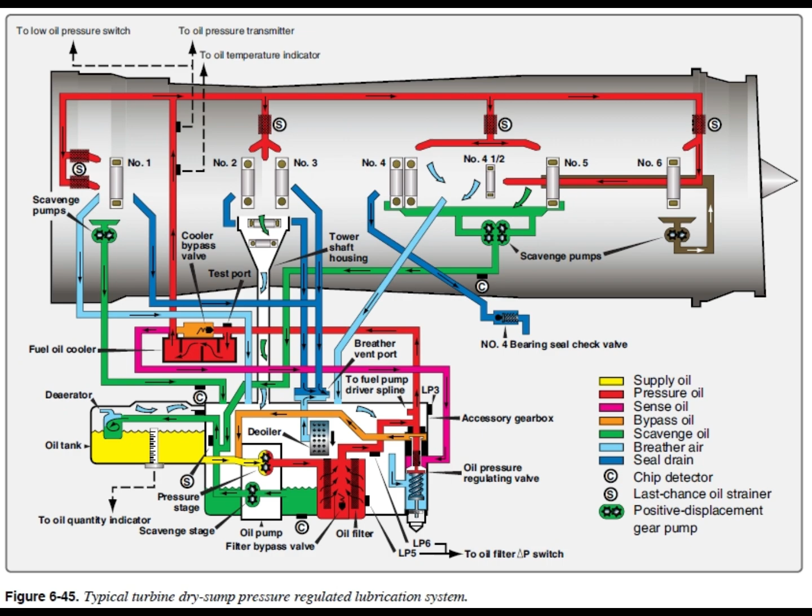And speaking of heat, have you ever thought about what happens when you turn on an anti-ice system? How does that affect engine performance? Well, when you activate the anti-ice, it uses bleed air from the engine, which takes away from the air going to combustion. So it reduces engine power a little bit. Makes sense. You're basically diverting some of that air away from creating thrust. What kind of indication would a pilot see on the instruments when the anti-ice is on?

Well, you'd see changes in the tachometer, EGT. EGT, that's exhaust gas temperature. Right, and EPR, engine pressure ratio.

Okay, here's a little thought experiment for you. Imagine an engine is running at high speed on the ground just before takeoff. What do you think happens to the air pressure inside the inlet? Well, you'd think the pressure would drop, right? Because the air isn't moving forward at high speed yet. That's what I thought too. But actually, it increases. What?

Really? Yeah, the inlet duct is designed with a divergent shape, meaning it widens as the air flows through. And this widening actually causes a slight pressure rise. Wow, that's counterintuitive. So even when the plane is stationary, the shape of the inlet duct is playing a crucial role in managing airflow and pressure. Absolutely. It's all about optimizing engine performance.

Now let's talk about reciprocating engines for a bit. They have a completely different cooling system compared to turbine engines, right? Yeah, they use a combination of air and oil cooling instead of relying primarily on internal airflow like turbine engines. Right, and I remember those air-cooled engines with their big cooling fins. How does that whole system work?

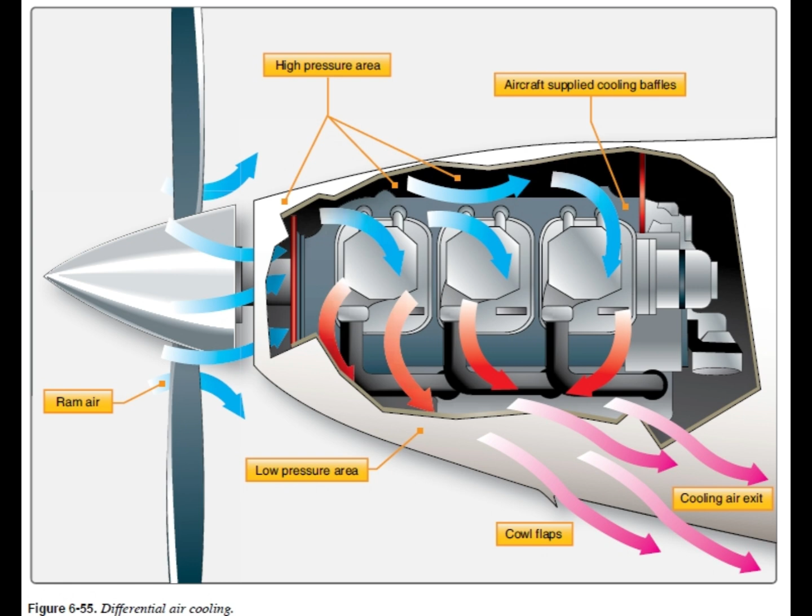When the engine's cold, the flaps are closed to trap heat and help it warm up. Once it reaches operating temperature, they open to allow more cooling air through. So it's all about maintaining that ideal temperature.

What about those cooling fins? Those seem pretty crucial to the whole air cooling process. Oh, absolutely. Those fins are essential for dissipating heat, but they can be vulnerable to damage. Yeah, I've seen fins cracked, bent, even completely broken off.

Vibrations, impacts from debris, it can all take a toll on them. So what happens if a fin gets damaged? Is it a quick fix? It really depends on the severity of the damage and where it is. Sometimes you can repair it, but if it's bad enough, you might have to replace the entire cylinder.

Wow, those fins are a lot more important than they look. Definitely. They might seem small, but their job is huge. It makes you realize that every single part of the engine plays a crucial role.

Speaking of which, we've got to talk about those temperature monitoring systems. They're like our eyes inside the engine, right. Absolutely. They give us that real-time data we need to keep those engines running smoothly.

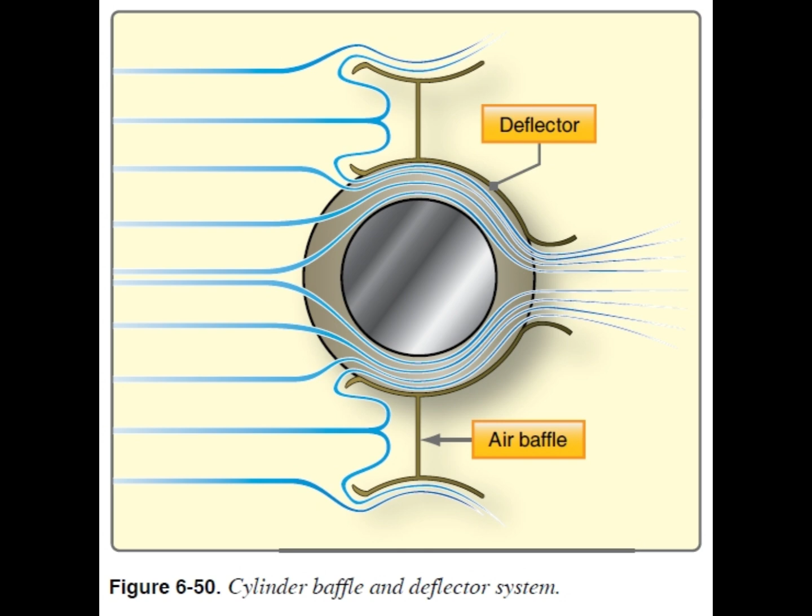So for reciprocating engines, you've got the bayonet and gasket type probes for the cylinder heads, right? What's the difference? The bayonet type is just like it sounds, it uses a bayonet fitting to attach to the cylinder head. So kind of like what you see on a rifle. Yeah, it makes it quick and easy to install and remove. And the gasket type uses a threaded fitting and a gasket to make a nice, tight seal.

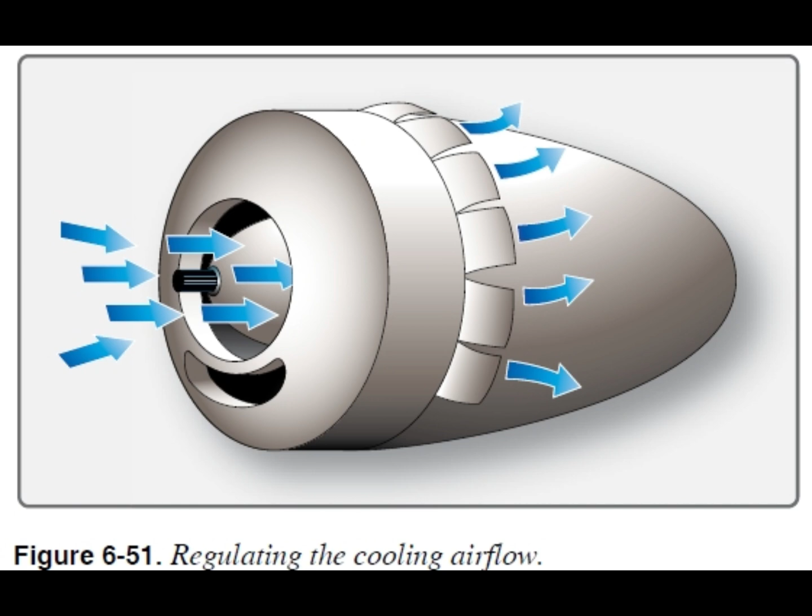So each type has its own advantages and disadvantages. Right, it often comes down to the specific engine and what the manufacturer recommends. Now, how do those probes actually work? How do they measure the temperature?

They use something called a thermocouple. Basically, it's a sensor that creates a voltage based on the temperature difference between two different metals. So one part of the thermocouple is touching the hot cylinder head, and the other is at a known cooler temperature. Exactly, by measuring the voltage between those two points, you can determine the temperature of the cylinder head.

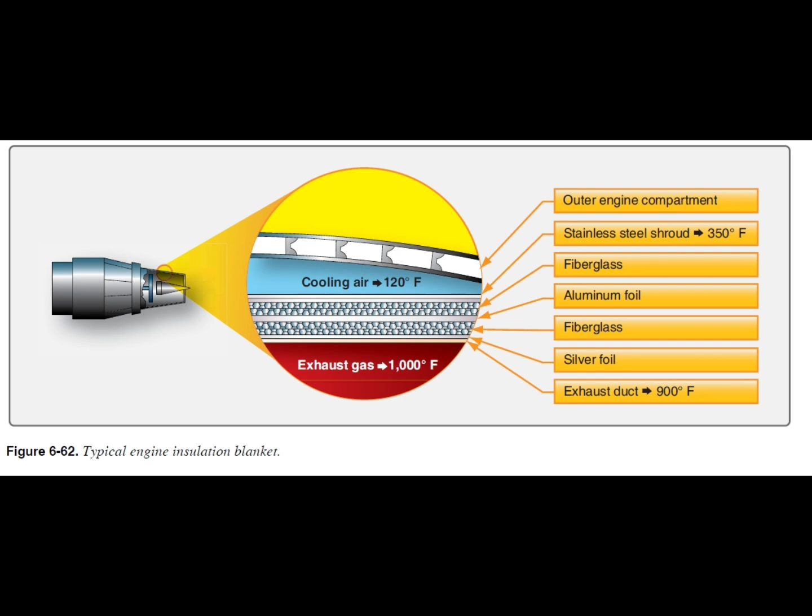That's pretty ingenious. I never realized how much science and physics goes into something as seemingly simple as a temperature gauge. It's amazing, isn't it? Just goes to show how much thought and engineering goes into keeping these engines running cool and efficiently.

This has been really eye-opening. We've covered so much ground today, and it's given me a whole new appreciation for these cooling systems. Me too, there's still so much to explore though. I know, I'm already looking forward to diving back into this next time. Sounds good to me, ready to keep talking about engines.

I was just thinking about those engine insulation blankets, those things that protect the surrounding aircraft structure. Yeah, those blankets are crucial. They prevent heat damage to all those important parts and make sure the whole aircraft structure stays intact. It's like they're a shield against the heat.

Exactly, a thermal barrier. And speaking of protection, I was thinking about those cylinder fins and how vulnerable they are to damage. They can get cracked and bent, even broken off. Oh yeah, and you know what? It could be something as simple as a pebble during taxiing.

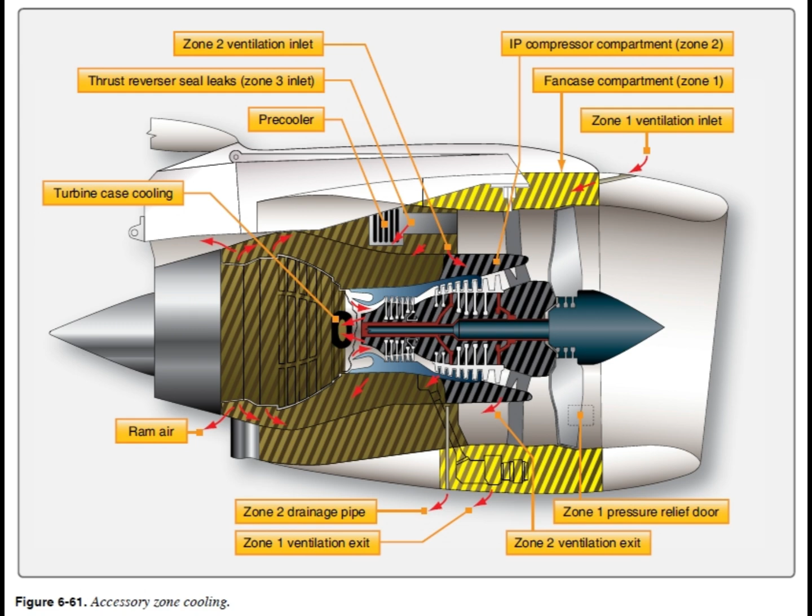I guess you really have to be careful during those inspections. Those inspections are so important. You've got to catch any little problem before it becomes a big one.

So if you do find a damaged fin, is that an easy fix? Well, it all depends. How bad is the damage and where is it? Sometimes you can repair it, but other times you have to replace the whole cylinder. Wow, it's amazing how such a small part can make such a big difference.

Oh yeah, they're tiny but mighty. So we were talking about temperature monitoring systems before. Those probes are so cool, they give us a look inside the engine while it's running. It's like having a window into that hot zone. And the technology has gotten so advanced, it gives you real-time data on engine temperatures.

It's incredible. But what happens if one of those probes gives a bad reading? How do you know what to trust? That's where the pilot's training and good maintenance come in.

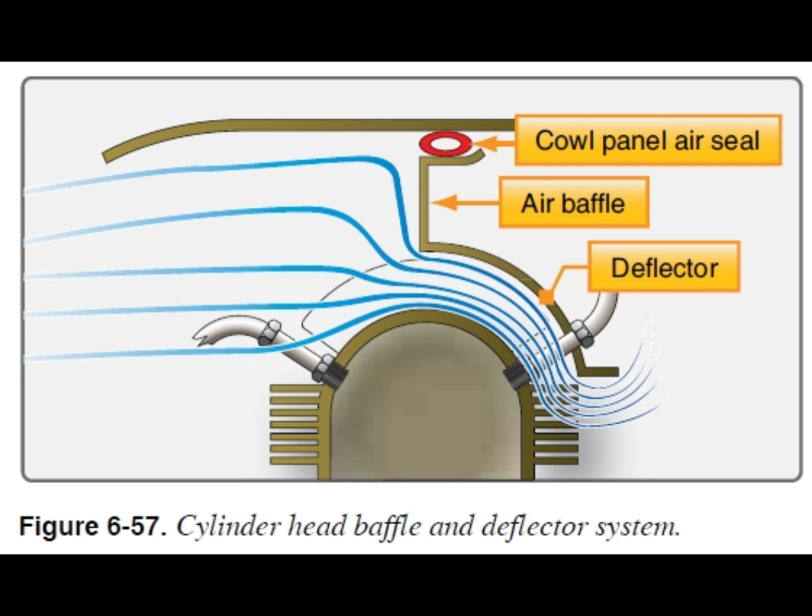Pilots are trained to recognize when something's off, abnormal readings, and we test and calibrate the probes all the time. So you've got a system of checks and balances to ensure the data is accurate. Right, the technology's great, but you still need that human element.

Speaking of human elements, you were talking about how reciprocating engines use a lot of air cooling. Can you walk me through that system again? Sure. So it all starts with the cowling, which is like a channel, guiding the airflow over the engine cylinders.

Okay, and those baffles and deflectors are strategically placed. It's like a carefully designed path, directing the air exactly where it needs to go. And then there are the cowl flaps. Why are they always moving?

Those cowl flaps regulate the amount of air going over the cylinders. When the engine's cold, they're closed to help it warm up. But once the engine is warm enough, they open up and let that cooling air through. So it's all about finding that balance, keeping the engine at the right temperature? Exactly, it's like you're breathing.

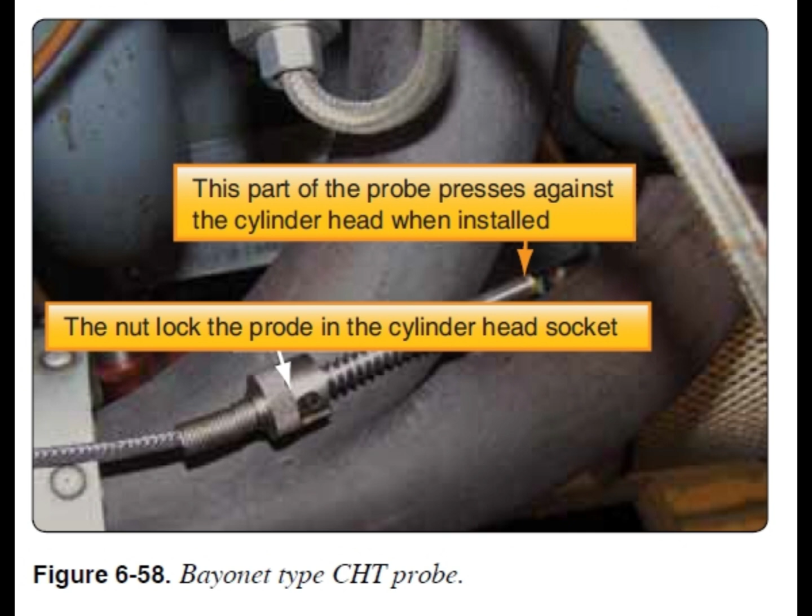Yeah, but isn't it more than just the quantity of air? It's also about the direction and speed, right? Oh, absolutely. Those baffles and deflectors actually create a high pressure zone around the cylinders, and that forces the air to go through the cooling fins. Yep, you got it, it's all about that airflow.

So you've got air cooling, but what about the oil cooling you mentioned earlier? Yes, the oil. So the engine oil actually absorbs a lot of heat from the internal components, think of it like the cooling system in a computer. So the oil circulates through the engine, picks up the heat, and then carries it away to be cooled down. Exactly, you got it. It's like a tag team, the air and oil working together.

It really is. It's a constant process of managing the heat, ensuring those engines stay healthy. It's a pretty impressive system. And it shows you how important regular maintenance is. Oh absolutely, maintenance is key. These are complex systems, and if you neglect them, you're asking for trouble.

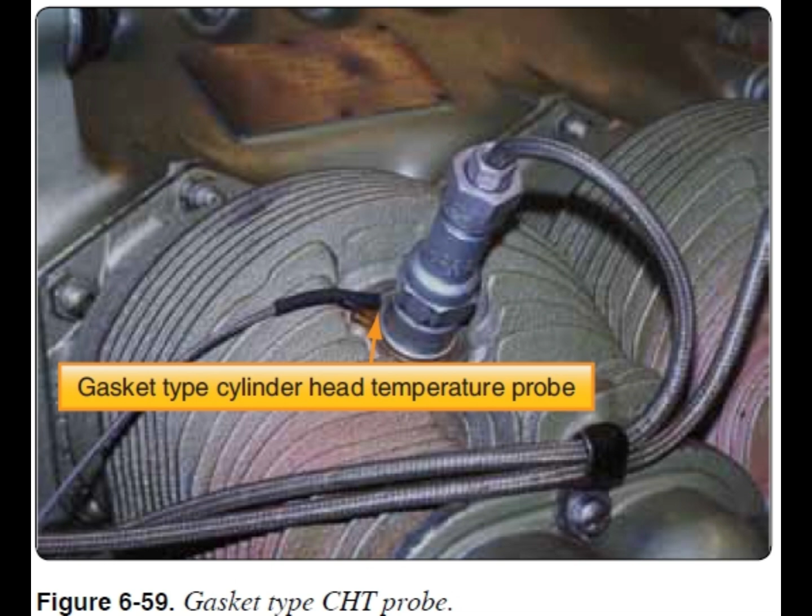Speaking of complex, let's go back to turbine engines for a minute. We talked about those accessory zones with their generators and pumps. Yeah, they need their own cooling systems, right? You bet. And it's not just about keeping those components from overheating, but also preventing fires. Remember, we're using bleed air for cooling, so it's hot.

Right, that bleed air is under a lot of pressure. What happens if there's a leak? That's when things can get a little hairy. A leak can lead to pressure loss, which affects engine performance. And if you have flammable vapors from fuel or oil and that leaking air ignites, a fire.

Yeah, not good. But they've thought of that and designed something called a pre-cooler. It's like a heat exchanger, and it cools down the bleed air before it enters the accessory zone. So the pre-cooler is like a safety net. Exactly, it condenses those flammable vapors and reduces the risk of fire. That's a really clever solution. Yeah, so much thought goes into every little detail.

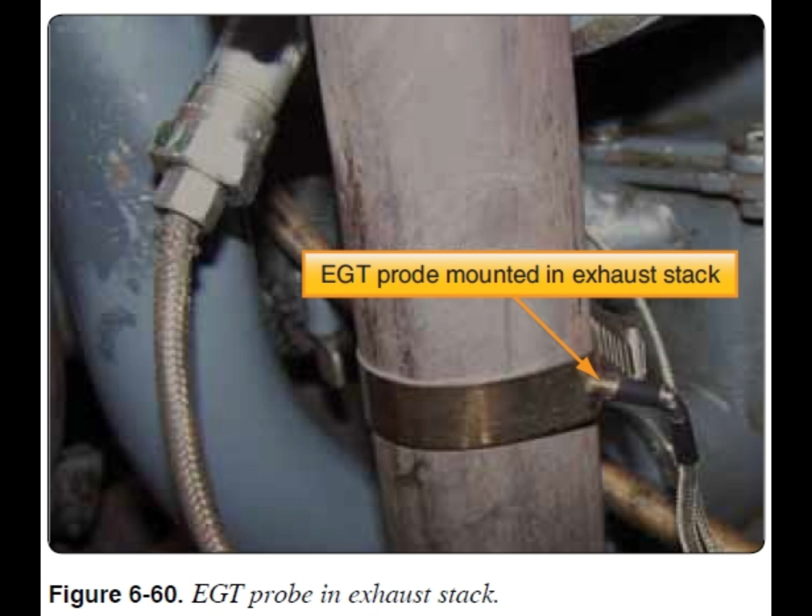Speaking of which, let's talk about the cylinder head temperature gauge. It's really important for monitoring reciprocating engines. Right, it gives you a direct reading of the cylinder head temperature, which is super important. So what does it tell you exactly? Well, it tells you how hot the cylinder head is, which is the hottest part of a reciprocating engine. Sure, and it helps the pilot monitor the engine's performance, helps prevent damage, and gives them information for adjusting the engine operation.

Almost like a warning system. Yeah, pretty much. If the temperature is creeping up, the pilot knows there might be a problem. It could be a blocked baffle or a bad cowl flap. So it's a way to catch problems early. Exactly, because if the temperature goes too high, you could have detonation or even engine failure.

Not good. So are there different kinds of cylinder head temperature gauges? Yes there are, you've got the bayonet type and the gasket type. What's the difference between those two? The bayonet type is just like it sounds, it's a bayonet fitting, like on a rifle, to connect to the cylinder head. Yeah, easy to install and remove. Okay, so what about the gasket type?

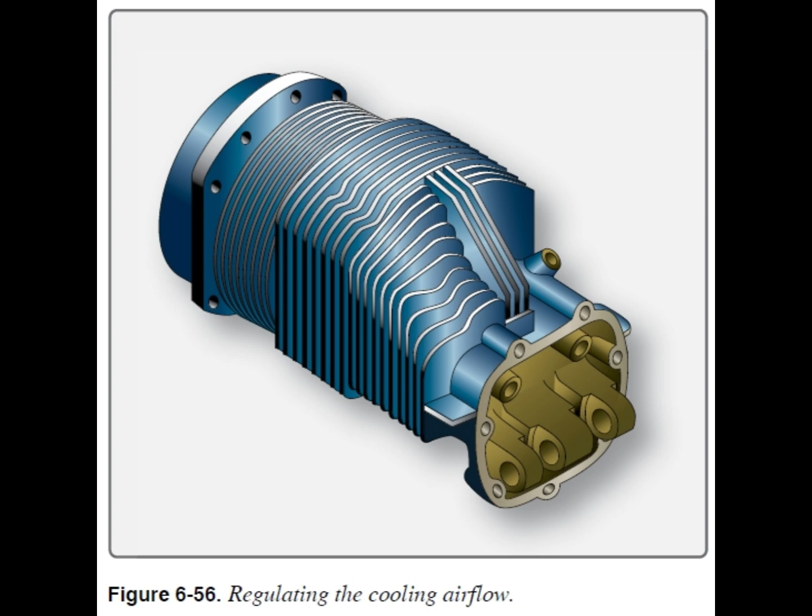The gasket type uses threads and a gasket for a more secure, leak-proof connection. So each type has its own advantages, and it really just comes down to what the engine manufacturer recommends.

Now, how do those probes actually measure the temperature? They both typically use a thermocouple to sense the temperature. A thermocouple is basically a sensor that generates a voltage based on the temperature difference between two junctions of different metals. So you have one junction at the hot cylinder head and the other at a known cooler temperature, and the voltage tells you how hot it is. It's a pretty elegant solution.

It really is. These engineers are smart cookies. They've harnessed these principles to create tools that we rely on for safe flights. It's amazing how such a small component can be so important.

Absolutely. It's all connected. This has been a really fascinating conversation. We've covered so much today, from those little fins to those sophisticated temperature gauges. It's really given me a new perspective on these engine cooling systems. Me too, and we're not done yet. There's still more to explore. I know, this stuff is really interesting.

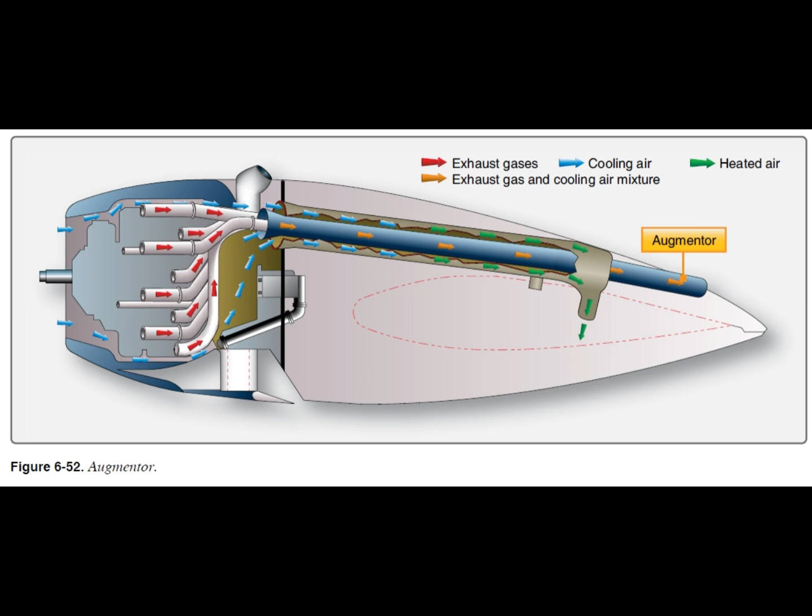So those cylinder head temperature gauges use thermocouples, right? Yep, they're pretty neat. It's amazing how they can turn heat into electricity, like little mini power plants. But they're vital for making sure we know what's going on inside the engine.

We've talked about how to measure the temperature of reciprocating engines, but what about turbine engines? How do you check the exhaust gas temperature on those? For turbine engines, we use something called an EGT probe, EGT, exhaust gas temperature. It's usually located in the exhaust stack, right after the turbine section, where the gases are the hottest. So the EGT reading is kind of like the cylinder head temperature for a turbine engine. Exactly. It tells you how the engine's performing and helps catch any potential problems.

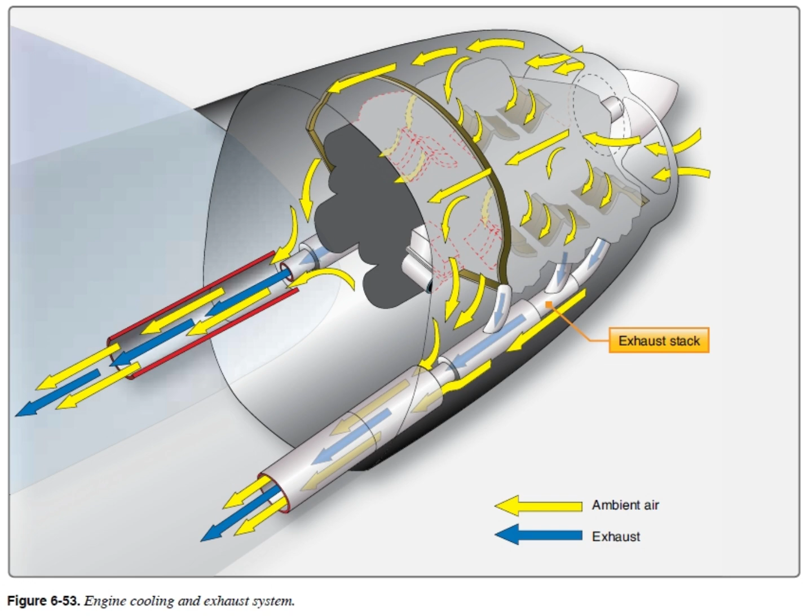Let's say the EGT suddenly spikes - that could mean there's something wrong with the fuel-air mixture or maybe a problem in the combustion chamber. So whether it's a reciprocating engine or a turbine engine, those temperature probes are super important for keeping things running smoothly. For sure, they give us a window into what's happening in those hot zones.

Now let's talk about those turbine engine insulation blankets again. We were talking before about how they protect the surrounding aircraft structure from all that heat. Those blankets are essential - they act like a shield, keeping everything safe from those high temperatures. And they're made up of layers of fiberglass, aluminum foil, sometimes even silver. But it's not just the materials - I bet the way they're installed is pretty important too. Oh, absolutely. They have to be fitted perfectly and secured really tight to the engine and structure.

I can imagine even a small gap would be a problem. Yeah, even a little gap could let hot air escape, and that could damage nearby components, or even create a fire hazard. So those blankets, they're not just protecting the aircraft, but also preventing fires. Yep, that's right. It's all about safety.

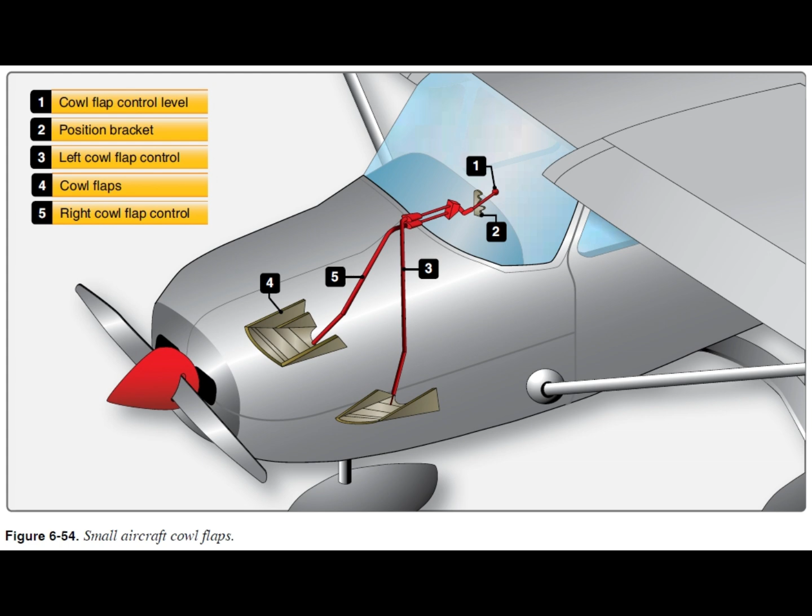Speaking of safety, we were discussing those pre-coolers earlier, the things that cool the bleed air before it enters the accessory zones. The pre-coolers are key for preventing those flammable vapors from igniting - just another layer of safety. It's incredible how much thought goes into every little detail. They really think of everything. Safety and performance go hand in hand - one can't exist without the other.

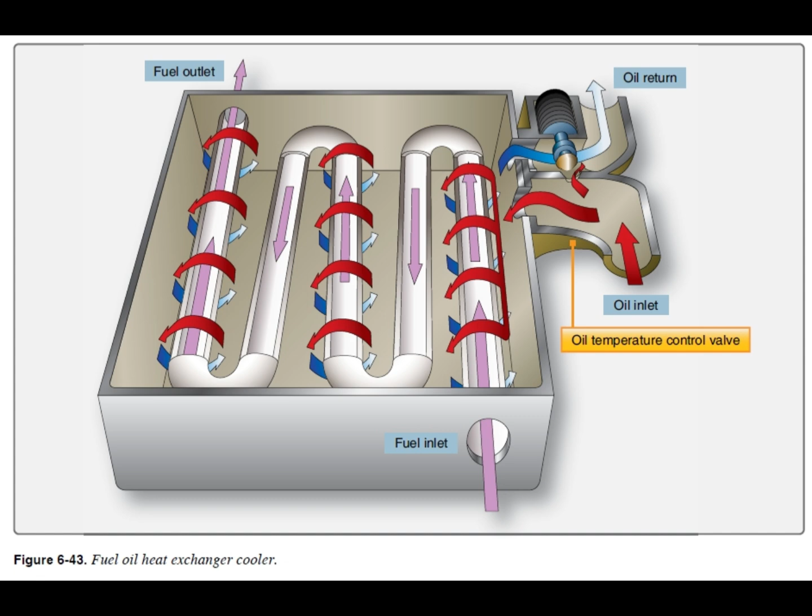Well said. Well, I think we've covered just about everything today. We've talked about so many different aspects of engine air and cooling systems, both for turbine and reciprocating engines. I've definitely learned a lot, and it's given me a much deeper understanding of how these systems work. It's been great talking about all these different components, from those tiny little cylinder fins to those sophisticated temperature gauges, and how they all work together to keep those engines running cool and reliably. It really makes you appreciate the complexity of these systems and the amount of engineering that goes into them.